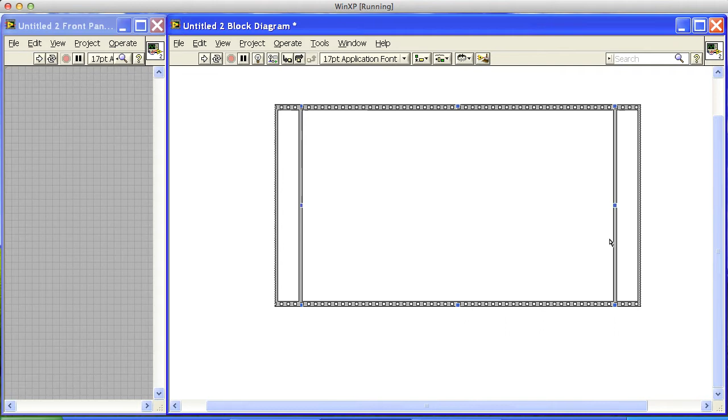So let's just do one here. The thing I want to do is drop down a flat sequence structure, and I will put frames at the front and the back, and I will take the value of the millisecond timer on the front end and the back end, and I will subtract those two.

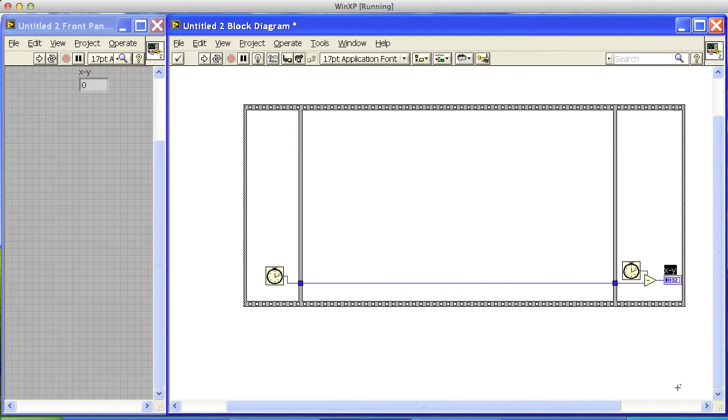And I can create an indicator. Again, I'm right clicking here, time, and that's in milliseconds. So if I go in here and run this guy, well, sure enough, that runs in time 0. So we'll need to do something in here that takes some time.

So one way I could count to really big numbers is using shift registers. Obviously, I could just tally up the number of indexes, but I want to actually exercise the memory here as well. So I'm going to create a shift register, and I will simply increment the shift register by 1, and then let's initialize this,

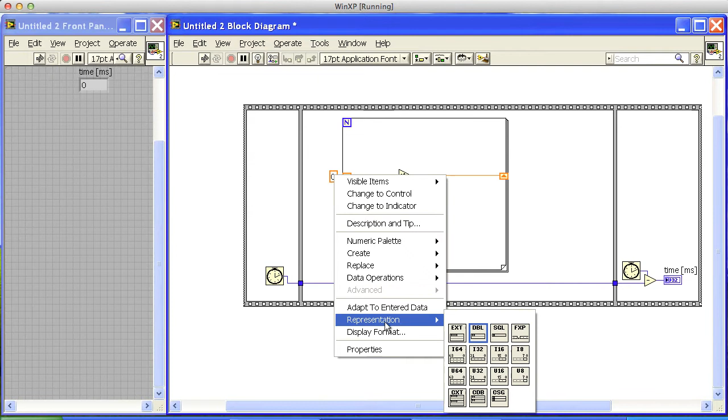and I'm going to do it with integer math. So notice that when I change the initialization, the +1 can take integers and floats and all different types of numbers. And then I will create a control here, which is number of loops.

So presumably if I type a number in here that's like, I don't know, 100,000, didn't see it, 10 million, so 10 million loops takes 14 milliseconds. So that's good. We're doing a lot of counting here.

And one thing that's important to keep in mind is that if I were to put an indicator inside the loop, writing to the screen is expensive, so we'd actually have to watch that thing count, and sure enough, it takes over 10 times longer, and then I should be able to right-click and hide that indicator, and well, actually, we're still doing some updates.

So this is probably more representative of where we want to be, because sure enough, we're probably going to have to do some memory management inside the loop. So it goes to show that already we're seeing a factor of, I mean, that's actually more like 20 or 30.

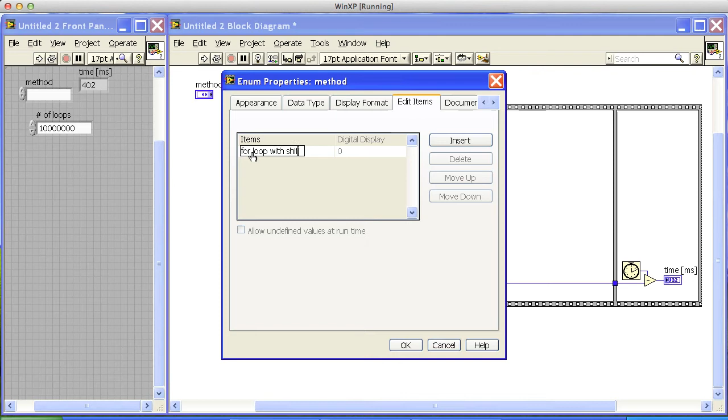So here we have a for loop with shift registers. And next we'll do a for loop with locals.

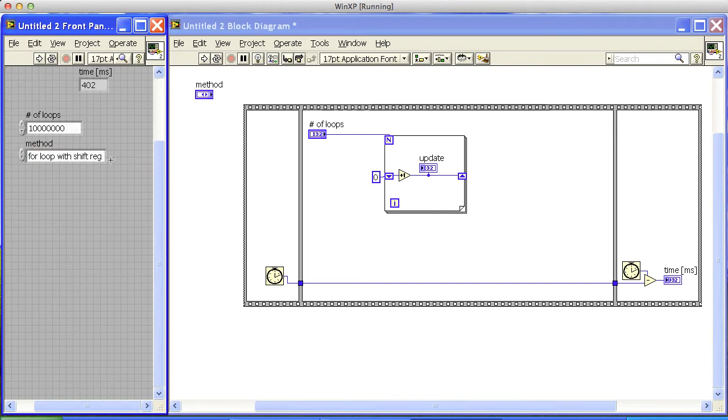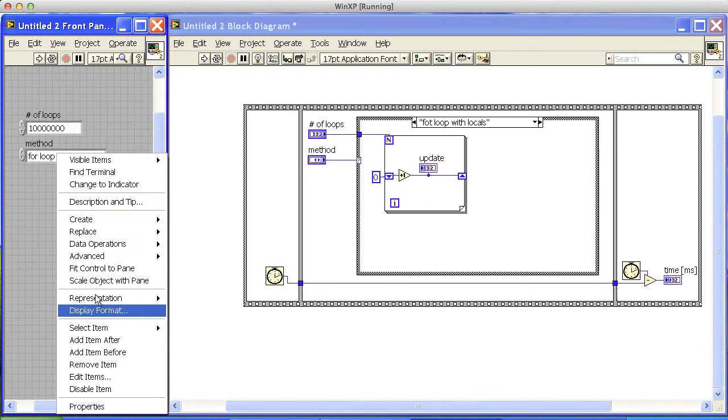I can come in here and create a case structure and wire the case structure up to my enum, and then sure enough the value in here looks like I've misspelled for with fot, so I'll go change that. Fixing my typos, for loop with locals.

This is the locals case, so I need to right click and say make this current case for loop with shift register. Oh, sorry, that was show. Make this case for loop with shift register. So there's for loop with shift register. So now I need to come in here and do for loop with locals.

So again, grab a for loop, wire a number of loops, and this time I'm going to need... I'll name him for shift, and I'll copy him out to be another one called for local. Come in here, there's my increment.

And might as well initialize him as well. Now technically there's nothing that's going to say that, oops, sorry, not doing a very good job of copying. Got to hold control down when I do that. So nothing to say that this loop over here won't run before or after this guy, but the reality is this is one execution, and this is 10 million executions, I believe. Yeah, 10 million.

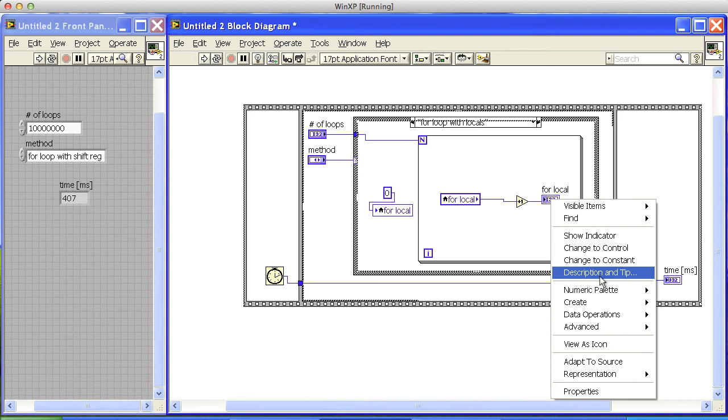Just showing this guy. And so for both the for loops with the locals and the for loops with the shift register, we're about the same time. We can see the for loop update. Let's see, actually we need to get, so there's for shift. So for loop with shift registers, there he goes. And when he's running again, we're getting about 430 milliseconds. And on the for loop, we're getting just about the same speed. So we're not paying much or any of an execution hit by using locals or shift registers.

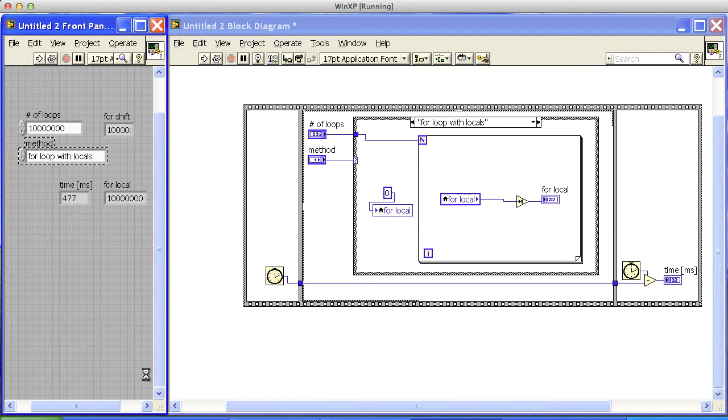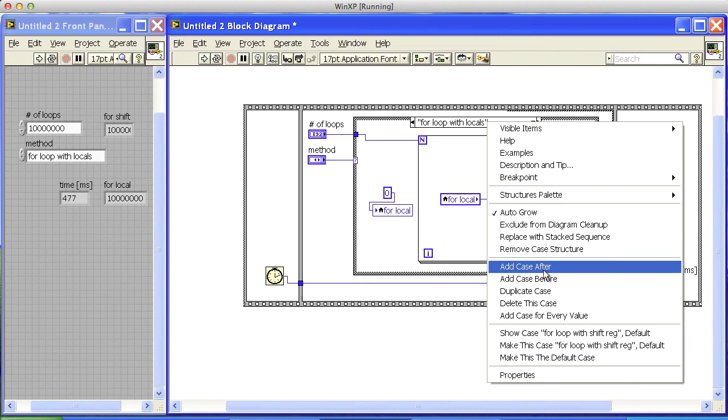Now I can go in and try this again, but we could do it with while loops. And so, for example, I'll go in and create one more. Again, I can edit items, and let's see how while loops compare. And we can just compare the case for while loop with locals. Okay. And on my shift register, notice I still only have two options here. So let's see, make sure I'm at the end, do add case after, and sure enough, while loop with locals shows up, which is great. Already filled that in for me. So I can, this time, create a while loop.

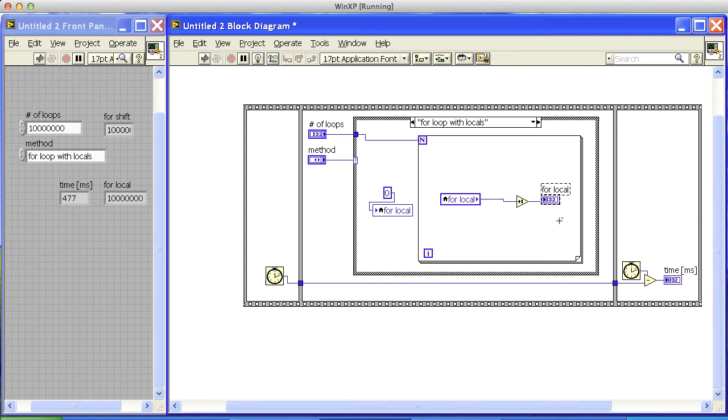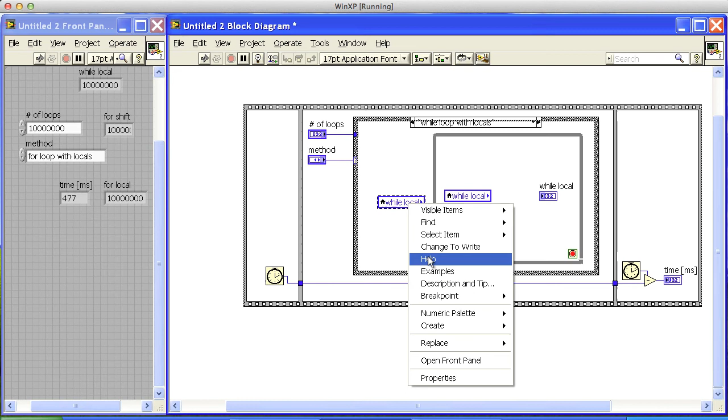I'm going to go back here and just grab a display. So now we have, oops. This is going to be while local. Get rid of that 2 on the end. And we can initialize him again. There's nothing to say that initialization will run exactly the first time. So I really should put a sequence structure to make sure that this happens before the loop. In fact, just for this case, let's just go ahead and do that.

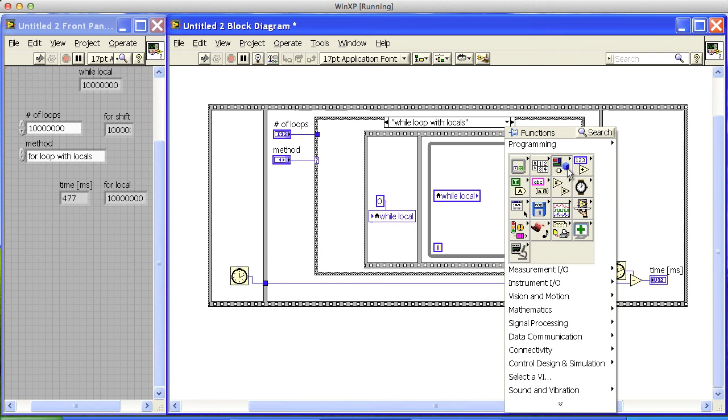So I will drop in a flat sequence structure, and then add frame before. Starting to slide off the screen here. And there's my initialization case. Here's incrementing. And then what I want to do is figure out when to stop. And when I want to stop with a while loop is, again, when we've counted above the number. Because we're incrementing here, we're actually going to track along with I, so I can do either one of these guys.

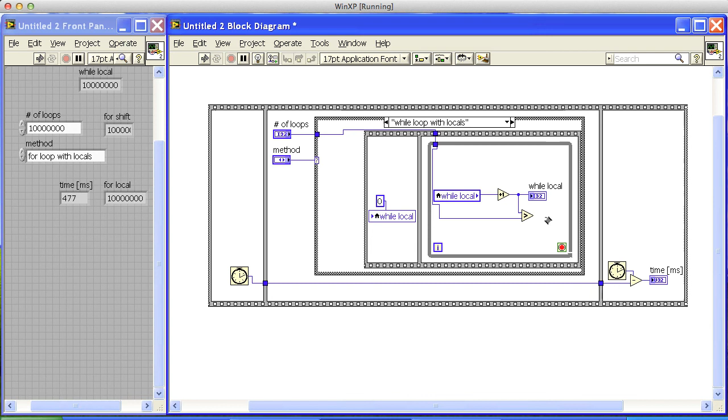And so what I'm looking for is that when the number that we're counting is greater than, then we want to stop. And so this is, again, the stop if true condition. Again, I right-clicked on my end terminal here, stop if true. And so now we can try and see, here's my while local, and we can run the while loop.

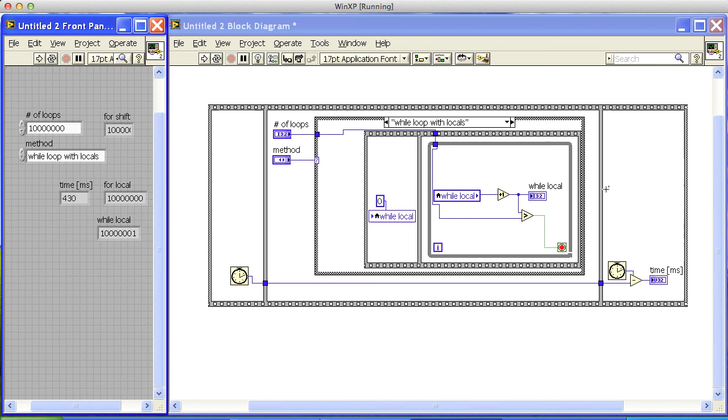So anyway, now we have a way to test the speed of 3 different structures by counting 0 up to 10 million, and in this case, even when displaying those values to the screen, we're doing that all on the order of about a half a second. So there's a quick tutorial on measuring computation speed with LabVIEW.